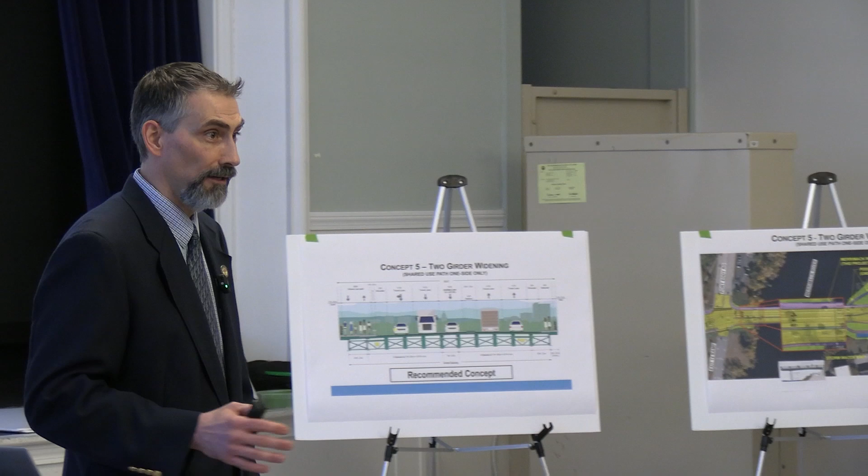Welcome, Loudon Road Bridge. You're all here because you saw the advertisement, so you know what we're talking about: Loudon Road Bridge over the Merrimack River. Let's run through our agenda really quickly.

After the welcome and introductions, we'll situate you with the location of the project we're talking about. We'll go into some history, go over where we are to date, talk a little bit about the purpose and need of the project, the concepts we've looked at, get into the budget and schedule at the end, and talk about next steps.

So let's start with introductions. I am Mike Bezanson, city engineer for the city of Concord. Our transportation engineer in the city is Karen Hill. She's not with us tonight, but she's certainly had a key role over the last few years in the development of getting the project to where it is today.

We also have Tony Punton here tonight. He's with DOT, our project manager, keeping us on track because this is a state and federally funded project, following all the procedures for that.

And then we have our engineering consultant group, and they're with us tonight. We have a full team. Rock Larichelle is here, and he'll be doing the bulk of the presentation tonight. We also have Keith Cota, technical advisor. We have Nick Karen, our design lead on the structural side, Debbie Finnegan, design lead on the traffic side, and Kevin Slattery, who's not here tonight but is our environmental lead. So that is the team.

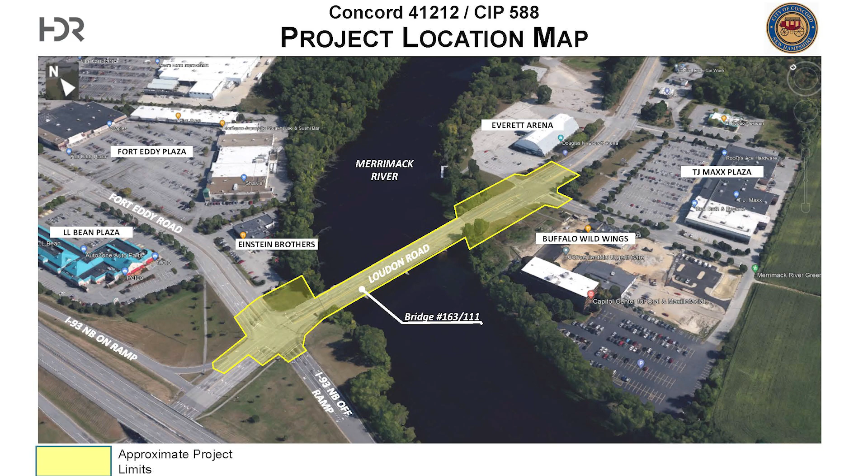So let's zoom in a little bit closer. This is really the project area. If you can see it highlighted in yellow here, this is what we're talking about, from either signalized intersection on either side of the bridge. That's really the project area, from Fort Eddy over to that first intersection with the Kiwanis Riverfront Park and the Everett Arena.

So all of the things that we'll be talking about are things that we're working on within this project area, and within this project area only, really.

So going over the project, basically it is a project that's in the city's CIP. We've already had funds appropriated in years past to begin the design, which is why we're here today, because we've had that funding.

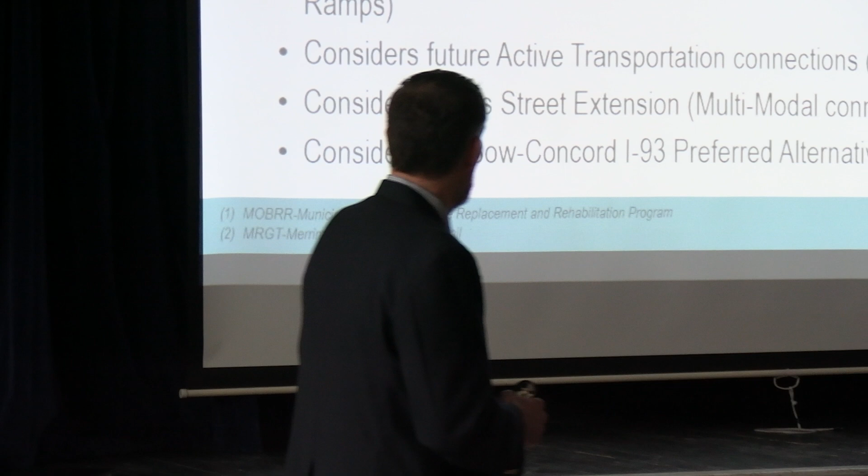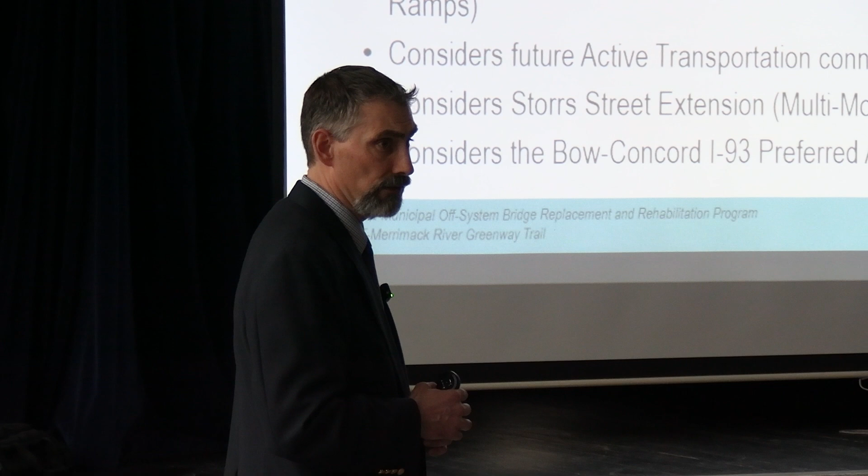This project also has a DOT project number because it's a funded project, state and federally funded. It's in the 10-year plan. We'll get into the funding a little bit later in the presentation, but you can see that there's a significant amount of construction funding already in the 10-year plan for the state.

Study limits, we went over that: Fort Eddy to Everett Arena. The project design is compatible with the multimodal plan.

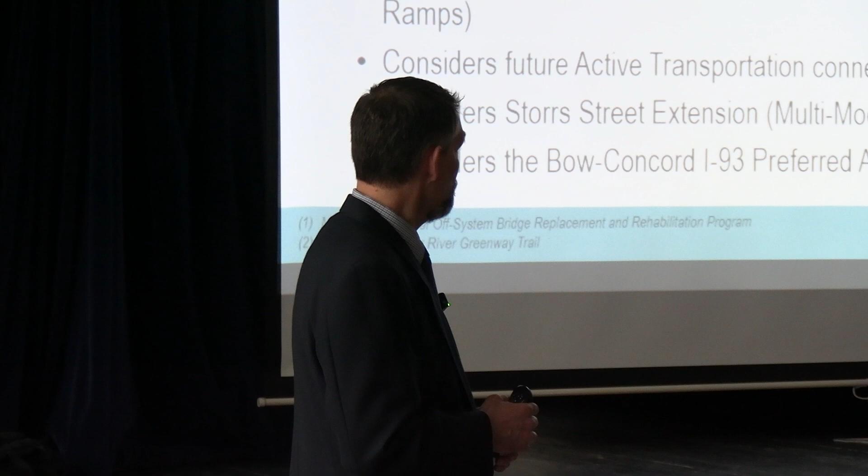So we have a multimodal plan that involves the Merrimack River Greenway Trail, and the Merrimack River Greenway Trail is being built out. Phase 2 just completed last year through the Gully Hill Fields area. And this project, we're looking to connect over the river on the bridge. We'll get into that a little bit more, some of the specifics, you'll see that in some of the slides.

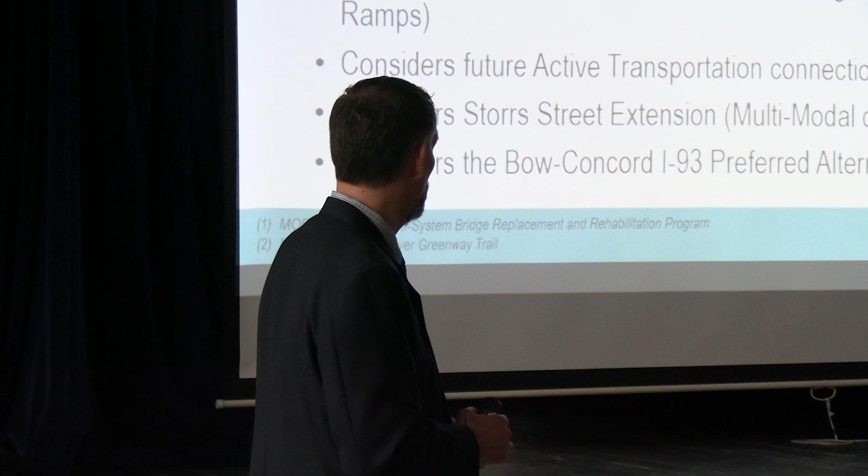But overall, the project is looking to address operational and safety concerns from a vehicular standpoint, as well as safety concerns from a pedestrian and bicycle standpoint. So we'll look at all of that. As I mentioned, connecting the Merrimack River Greenway Trail, and obviously we will be coordinating with the I-93 Bow Concord project, since it's right adjacent to our project area. So we'll be coordinating with what's going on there.

But this meeting tonight, as we get into questions at the end, we'll be focusing just on the Loudon Road Bridge project. So although there may be folks here in the room who are familiar with and part of the team for the I-93 Bow Concord project, we're going to focus tonight on the Loudon Road Bridge.

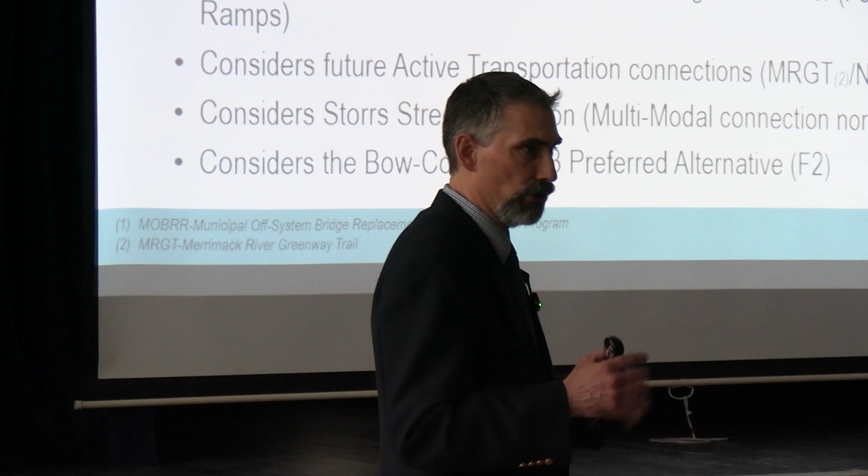Thanks, Mike. First, thank you for being here tonight. I'm grateful that you're taking time out of your day to come listen to this presentation, and obviously you're interested and involved in your community. We're going to throw a lot of information at you tonight, and hopefully we'll get some input back from you as we continue through the design process.

It's a great project that we've been involved with for quite some time now. I know the project's been around for a while, so we're going to walk you through some of the details and hopefully answer your questions.

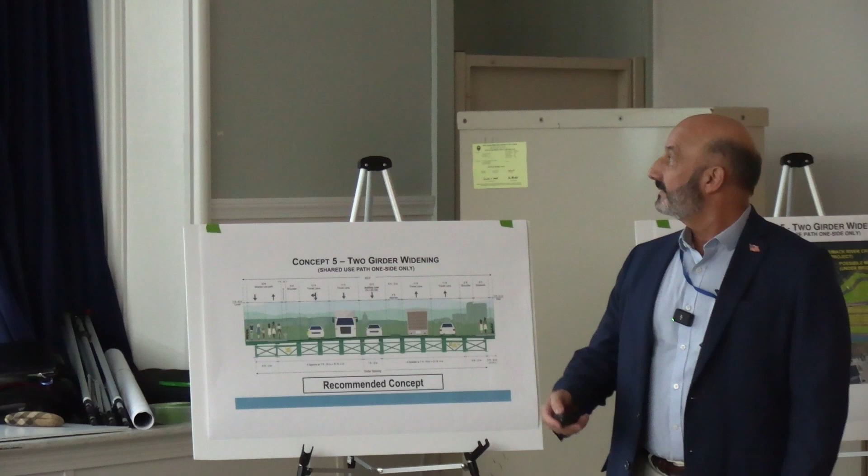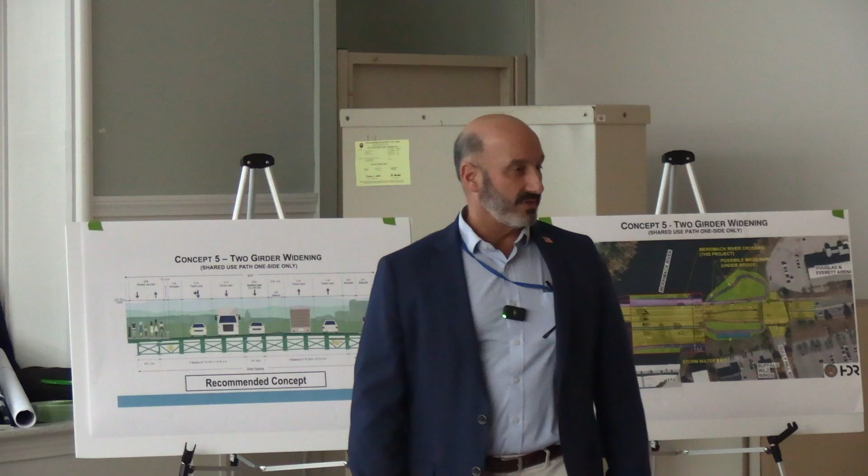First, through the project development process that we have to follow. This is a pretty laid out process associated with the state and federal funding we're working through. When you look at all these bullets, what I just highlighted in red is kind of where we're at now. We've already been through some of the data collection process and analyzed some existing conditions.

I'll show you where and when we did that earlier on. Tonight we're going to show you what the purpose and need statement is that's been developed for the project, and what it really means to moving forward with the development of the project. We've also looked at a conceptual range of alternatives.

We have some more work to do there after we get some input from folks tonight and as we continue on with the design process. And we're looking to seek input from the public, from you folks all here tonight.

Following this meeting tonight, we'll be continuing to look at some of the environmental impacts of the alternatives, how it's going to fit in with the community, how it's going to fit in with the physical properties of the area. And then we're going to move towards a recommended preferred alternative that meets that purpose and need statement that I'll show you in a bit.

And ultimately develop a proposed action plan that we can build. This is just kind of a snapshot of the typical development process that we're following. It's called the LPA process, Local Public Agency process that we have to go through.

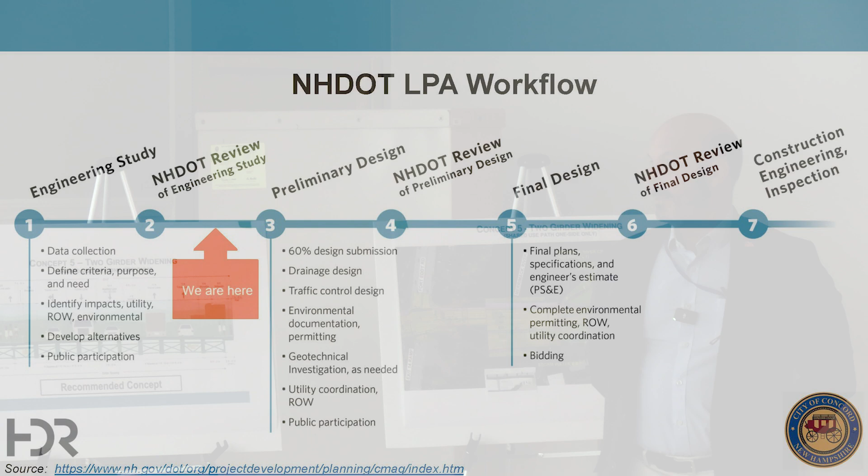And where are we at in this process right now? We're about right here. There was an engineering study completed back in 2020, I'll show you the timeline for that. So there's been a little bit of work done back then to get to where we're at right now. Now we're partway through that preliminary engineering phase, and we're going to be getting further into that, moving along through final design and construction. That just gives you a snapshot of where we're at.

So what have we done to date? I said we've been working on the project since about 2020, and I'll give you a snapshot of this. I'm not going to expect you to read all of this, there's a lot of information here. But just as a snapshot, since 2020 we started an engineering study in that time frame.

We made a number of presentations to TPAC and City Council. A few of you here tonight attended those meetings, so hopefully you remember that. The whole purpose of going through that engineering study was to identify some of the constraints and possible alternatives to solve some of the problems in that area dealing with the bridge condition, access for pedestrians and cyclists as well as vehicles, and how we could improve some of the safety and mobility issues within the corridor along the bridge.

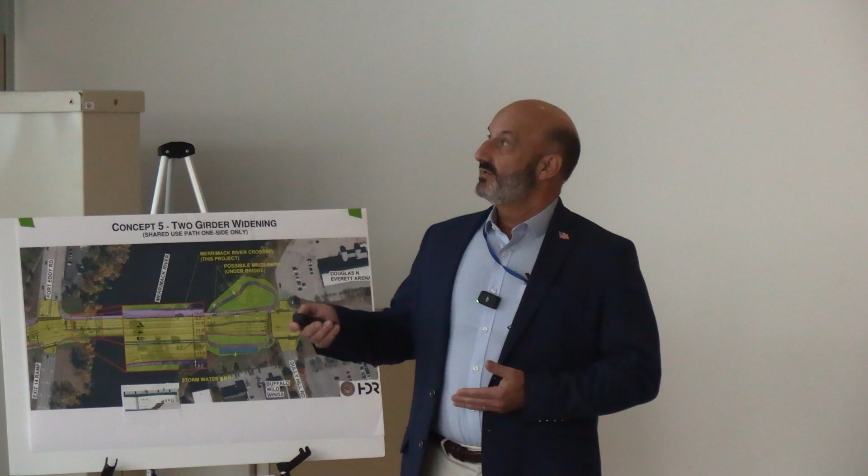So we made a number of presentations to TPAC through 2020. We had a draft engineering study submitted in early 2021. Then at the end of 2021, that all culminated in making a presentation to the GACIT Committee, the Governor's Advisory Council on Intermodal Transportation. Ultimately, what we sought out of all that was to get additional funding for the project. Originally, the project was funded at the federal level at $9 million, which only accommodated for a small deck rehabilitation type project.

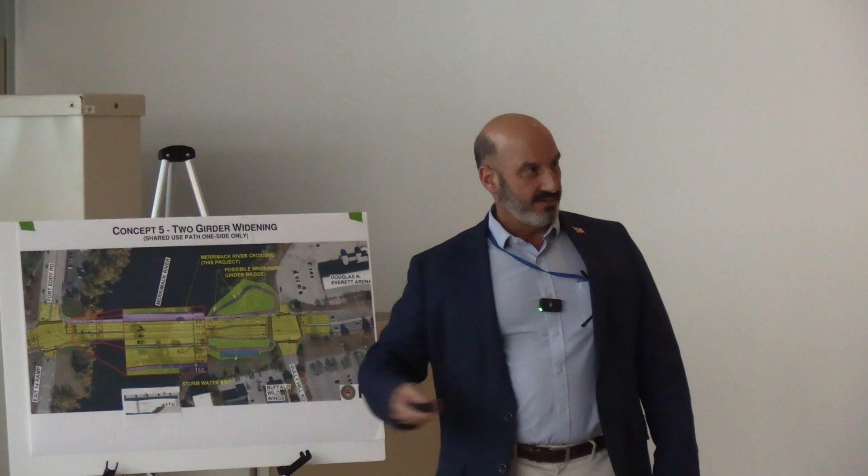Ultimately, with some of the goals brought forward by the city for what the project wanted to be, to accommodate more multimodal needs and safety improvements, we were successful in getting additional funding through the state's 10-year plan to the sum of about $25 million, which is what Mike presented earlier. After that, at the end of 2022, there was a little bit of a lag because the 10-year plan was getting authorized, and Mike was just coming on at that time, so there was work he had to do to get the project into the program at the city level.

We were authorized to start our data collection phase in early 2024. There's a little lag as things got into play, the money got into play, contracts got underway, and we started what we called phase one. We've already been out there collecting a lot of traffic and environmental data. You might have seen people counting cars and collecting information. All of that goes into the decisions on how we move forward with the design and finding a project that fits within this community. In January 2025, not so long ago, we were finally authorized to move forward with the design phase. We collected data, and now we're moving forward with the design phase. That takes us to tonight, March 20, 2025, and from there we'll continue to move. I'll look at a schedule a little later and show you where we're going to end up.

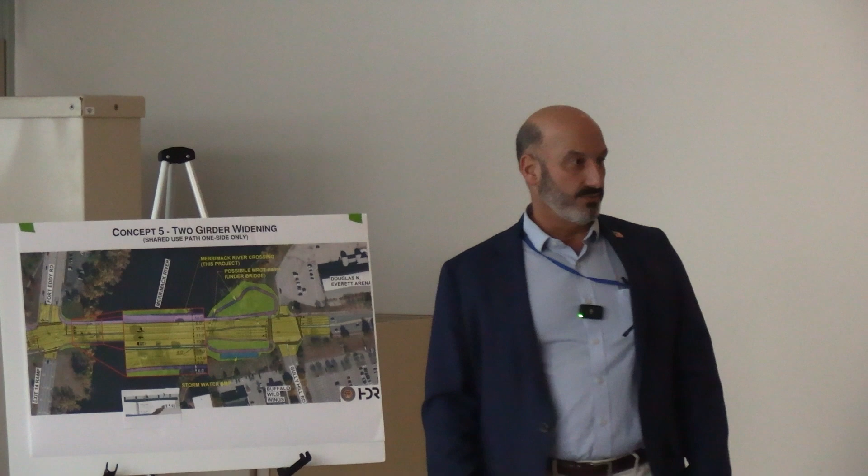So the study area for the project is defined here, what's highlighted. We've collected traffic information all through this project area in this corridor, all the way up Fort Eddy Road and Loudon Road, updated traffic information from what was originally studied in 2020, because some of that information was dated. The whole point of getting updated information in 2024 was to look at how the corridor is operating now post-COVID, and refine the design to make sure it worked with what we're trying to do now with safety improvements and modifications.

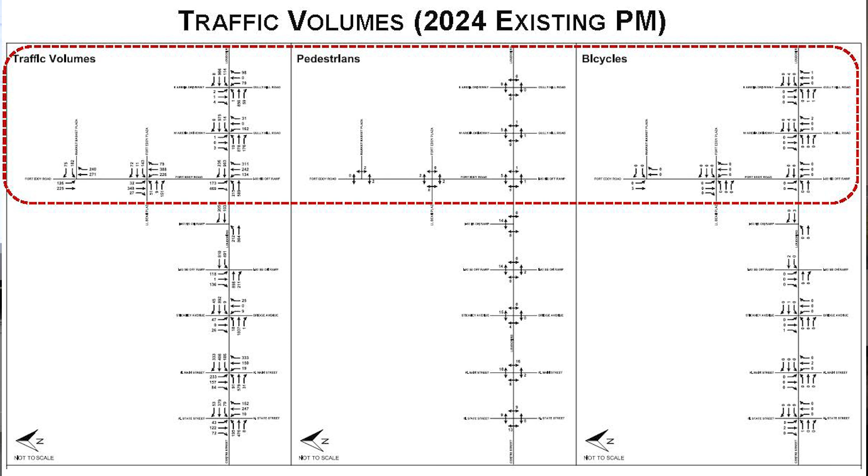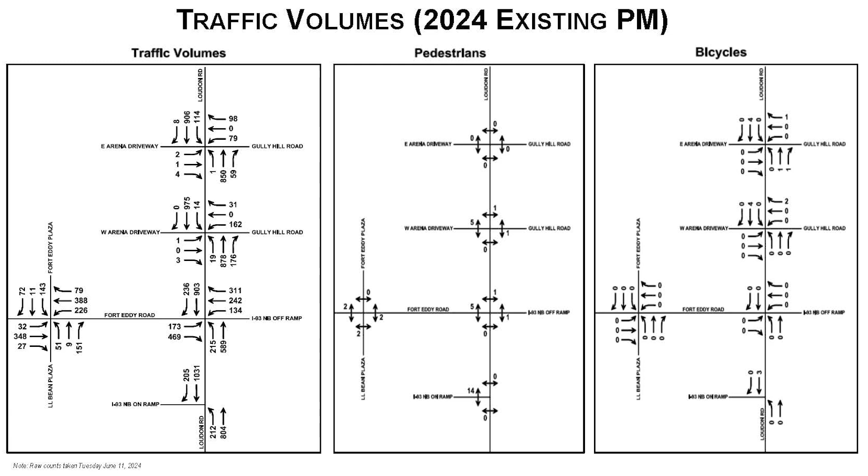You're not going to be able to read this, but this shows the traffic volumes collected in 2024 and what the network looks like after all that data collection is put on a plan. This area here is really the project area we're concerned about — the ramps and Fort Eddy Road, and this is Gully Hill Road here. We also collected traffic information as well as pedestrian and bicycle information, and that all goes into the study we're evaluating moving forward.

Interestingly, back when we did the original study in 2020, there was traffic collision data collected from 2015 to 2020. One thing I want to point out is this intersection at Fort Eddy Road had a total of 77 crashes over that period, which is very high, resulting in a very high crash rate of 1.26. As you approach 1 and go over 1, that's one of the things we look for as an identification that there are needs there.

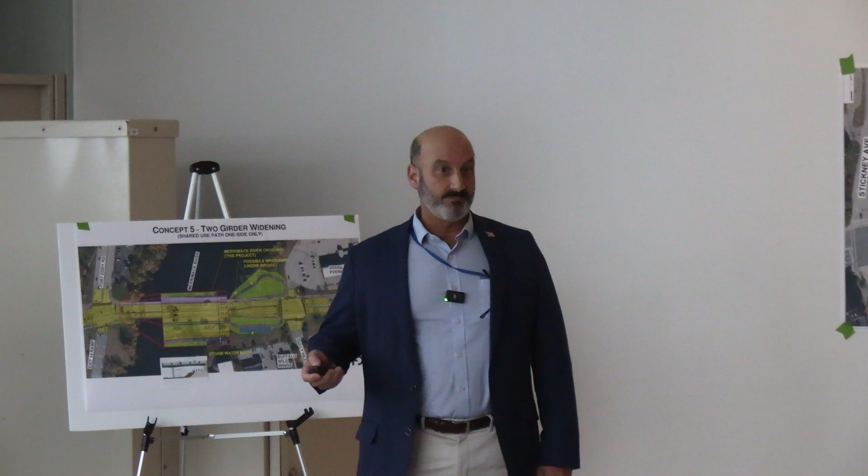As far as data collection, one of the things we also have to do is go through the environmental process — identify resources, figure out how they'll be impacted by the project, document that, and that becomes part of the permits and approvals we're ultimately going to have to seek. The environmental process involved early constraints identification, so we've collected information from wetlands to invasive species, wildlife and fish habitat. Some of this is still going on now as I'm talking. Ultimately it's going to support the NEPA document and permitting — the National Environmental Policy Act. It's a whole permitting process we have to go through to satisfy certain needs in association with the funding we have for the project.

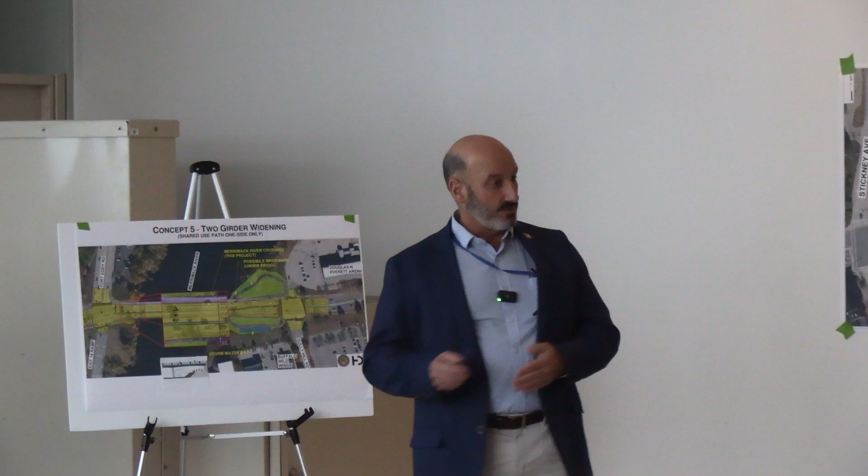One of those needs is the development of a purpose and need statement. The purpose and need statement is developed by the project team with input from various constituents to look at and judge the project. The future project has to be judged against the purpose and need statement — are the alternatives we're developing supporting the purpose and need statement that's been developed? We have to look at the alternatives against the purpose and need statement, and if the alternatives don't satisfy it, they probably shouldn't be applied.

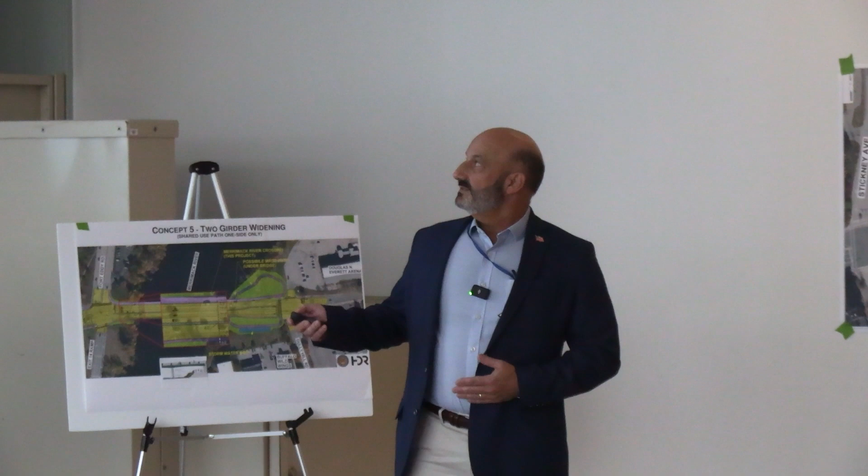The purpose and need statement is required for NEPA clearance, the National Environmental Policy Act. It defines transportation issues and needs, states the reason for the undertaking and the intended outcomes, and is used to compare the effectiveness of build alternatives against the no-build alternative.

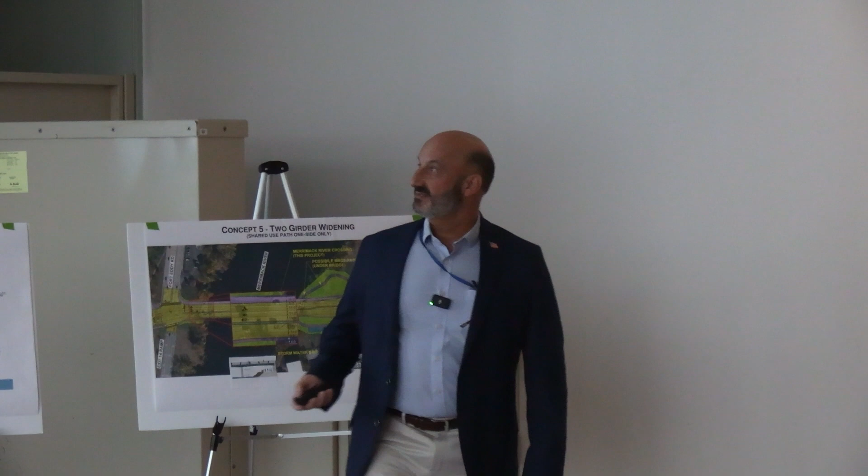For this project, the purpose—and I want to read this because it's important—is to address structural deficiencies, safety concerns, and conflicts between vehicles, bicycles, and pedestrians on Loudon Road and the municipal red-listed bridge over the Merrimack River.

That's the overall purpose of the project. The need is defined to address the following: structural deficiency of the deck—it's a bridge project first and foremost, it needs a lot of work—and superstructure and abutment back wall deterioration.

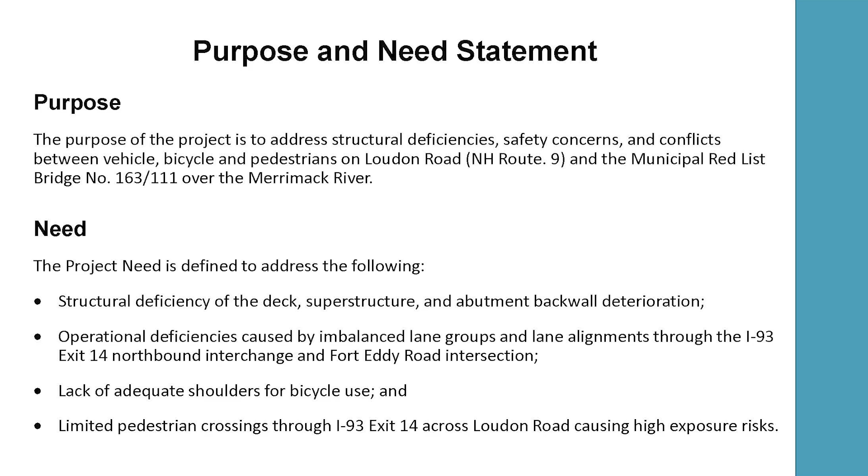Second, operational deficiencies caused by imbalanced lane groups and lane alignments through the I-93 exit 14 northbound interchange and Fort Eddy Road. You all know there are issues at those intersections. The project extends from Gully Hill Road, including Fort Eddy Road, so our job is to look at how those intersections operate and find improvements that won't worsen conditions and might make things a little better.

Lack of adequate shoulders for bicycle use—if you've been out there, it's pretty awful, the things I've seen on that road are pretty scary. So you'll see with the options that have been put together, there are better accommodations for bicycles and pedestrians: sidewalks, shared use paths, shoulders, to allow for improved safety, buffers to vehicles, and better organization for the traveling public. There are also limited pedestrian crossings through the I-93 exit 14 across Loudon Road, which is something we're taking a look at as well.

In association with that, we defined a series of goals and objectives, and all of these go into evaluating each of the alternatives we're studying as part of the project: provide improved service life for the Loudon Road Bridge over the Merrimack River, and address structural deterioration and removal from the municipal bridge red listing.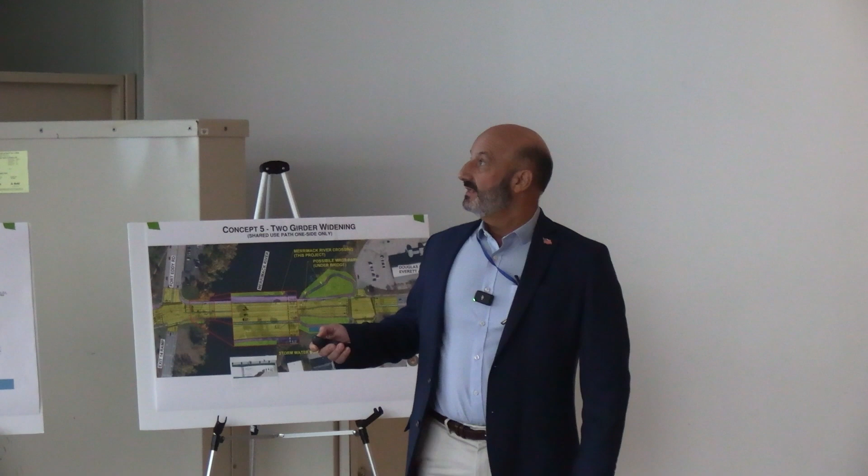Implement infrastructure improvements that will accommodate the city's long-term objectives for multimodal and recreational connections between Kiwanis Waterfront Park, the Merrimack River Greenway Trail, and the Northern Rail Trail. These are all things we heard during the engineering study that were vitally important to the community, so they really had to be incorporated into the project.

That was one of the goals we had as part of the project—how can we accommodate these needs and make accessibility improvements as we move forward. That was a big consideration, and you'll see that as we get into some of the alternatives that were reviewed in the engineering study back in 2022.

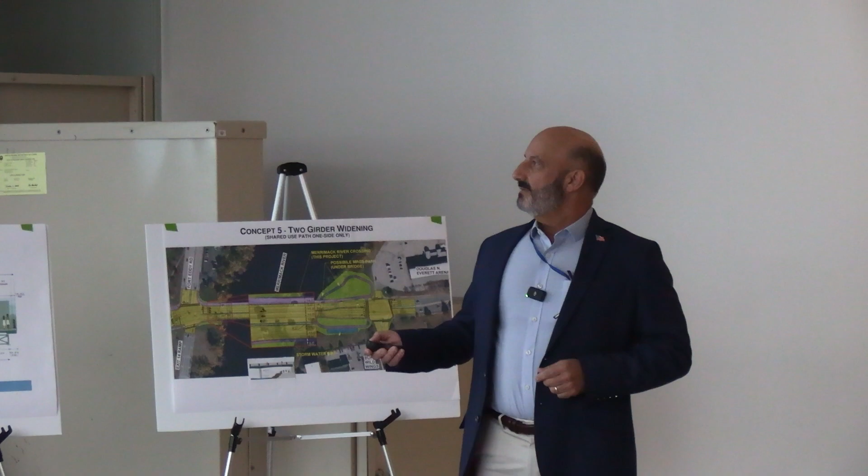Complement and accommodate improved operational flow and traffic safety. We're looking at operations at Fort Eddy Road, and some of that includes operations at exit 14. This is not the interchange project—we're really focused on abutment to abutment and those two intersections, and how we can make safety improvements there.

Implement needed utility infrastructure improvements. One of the things we've been working with Mike on is coordinating the need for water line improvements, and there's another consultant working on that as well, which will get integrated into this project as that design moves along. So that's all part of what goes into the bridge. There are utilities hung under the bridge, including the water main, and any utility that's impacted has to be properly supported during construction, maintained, and or replaced as improvements are needed.

Last, minimize project impacts to local businesses as well as natural, cultural, and environmental resources. What we're really trying to do is keep a very tight footprint, even though we're looking at wider accommodations mainly for pedestrians and bicycles, and safer accommodations for vehicles, so we're not having significant impacts to the right-of-way or the natural and cultural resources out there.

Now I'm going to step you through the concepts we've looked at. Some of this stems back to the study done early in 2020, so you're going to see some early concepts. I'll step you through a series of 5 concepts that were evaluated for the bridge, and tell you why.

One of them just included a deck replacement, with 5-foot sidewalks on either side. This was basically putting back what's there today. If you look at what's there today, we'd put it back and make some minor modifications, but it really wouldn't change what's there today.

The second alternative again looked at deck replacement, but looked at widening the sidewalks and shoulders—adding a shoulder width instead of the 2-foot, where there's virtually no shoulder width out there today—adding wider shoulders and wider sidewalks, going a little bit wider.

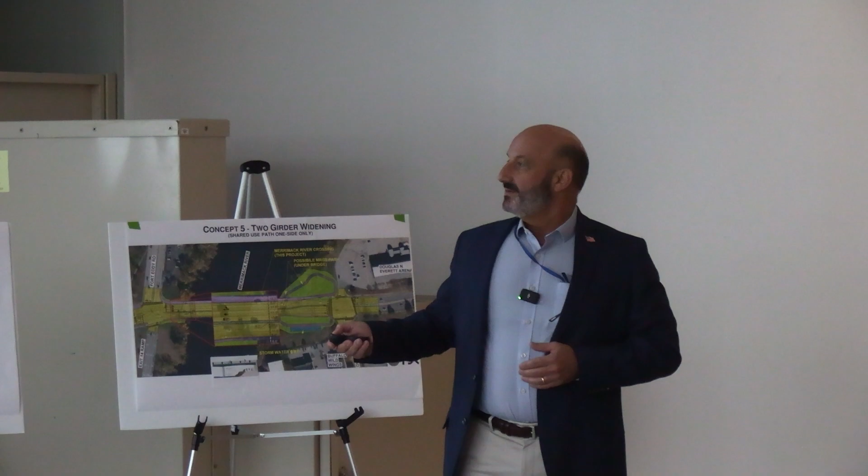Alternative number 3 looked at one-girder widening, so incremental modifications to the bridge to make it a little wider for better accommodations, including a raised island in the middle. It went to 5 travel lanes, 6-foot sidewalks, and 5-foot shoulders. Alternative number 4 included 2 girders, so you get the sense of what's happening here.

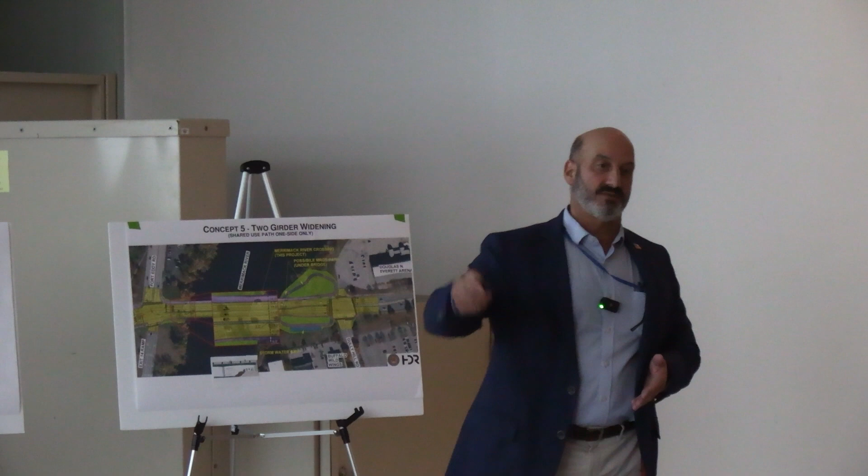The last 2 alternatives included shared use paths, and this is when we started looking at accommodations for the Northern Rail Trail and the Greenway Trail, and how we could accommodate those connections for improved multimodal uses. So those are the last 2 alternatives.

Concept 1: no bridge widening. This is a nice cartoon figure showing what it looks like out there today. You have 2 lanes heading up to the Heights, 2 lanes heading into downtown, and a right turn lane that goes into Fort Eddy Road. In the middle is kind of like no man's land, where there's a gutter that's painted, and that's where the drainage goes when it rains.

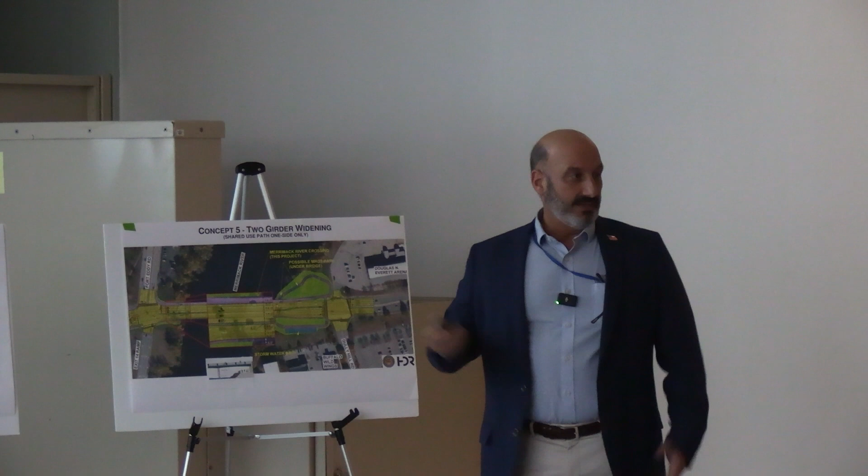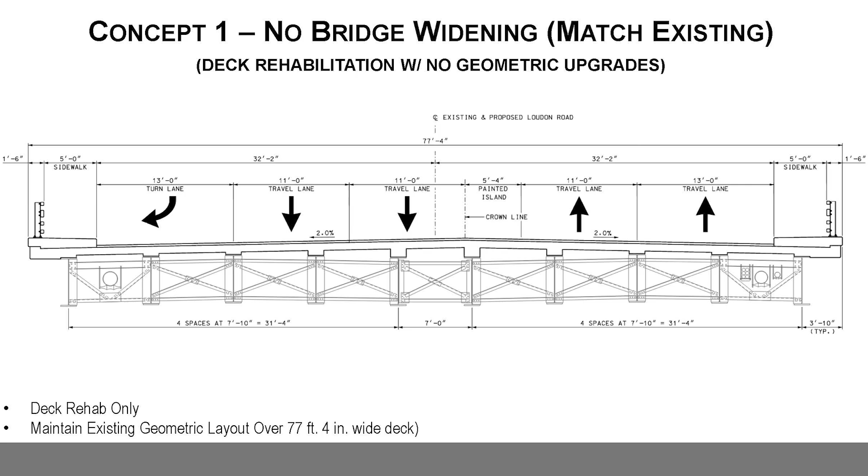So concept 1 would basically put that back, no bridge widening—this is the engineering version of that concept. No bridge widening, match existing, but we'd make some improvements to the overall bridge typical section and eliminate the gutter in the middle. Put back the 5-foot sidewalks, maintain the lanes out there: a turn lane, and 2 through lanes each way.

That's concept 1—no accommodations for connections to the Greenway Trail or any path connections, or wider shoulders. Concept 2 shows lane reassignment only. What that did is take the right turn lane into Fort Eddy Road and combine it with the through lane, because the demand wasn't shown to be there from the traffic volumes we were looking at.

So combining that took the width from that right turn lane and redistributed it into 5-foot shoulders on either side and a 6-foot median in the middle, with 6-foot sidewalks on either side. That's concept 2—no significant widening, no additional girders. It basically takes the existing structure and builds on top of that.

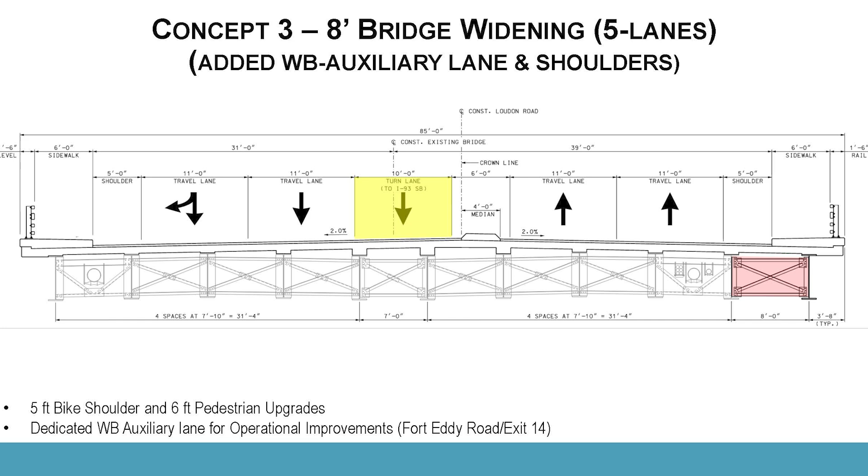Concept 3 added a westbound auxiliary lane. What does that mean? This lane would become a dedicated turn lane that would ultimately go to the southbound on-ramp for I-93. As you know from sitting in traffic out there, a lot of that traffic queues up back past Gully Hill Road and causes significant congestion issues, especially in the PM condition.

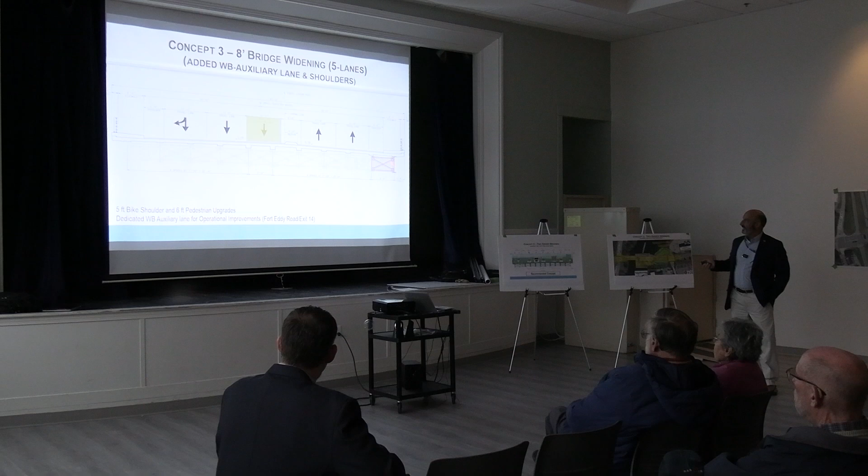So this also combines the right turn lane to Fort Eddy Road, maintains these 2 through lanes which go into downtown, and 2 lanes which go up to the Heights, 5-foot shoulders, 6-foot sidewalks, and one new girder on the outside, on the downstream side.

Concept 4, similarly, introduced a 12-foot shared use path on both sides. So we asked, what would it look like if we put shared use paths on both sides of the road and widened to accommodate that, plus a new left turn lane and a dedicated westbound auxiliary lane to the interstate. That resulted in a significant widening, 97 feet overall, with a 20-foot widening on the bridge. That was concept 4.

We'll look at the costs associated with that in a minute. That's the last thing we looked at - how does that reflect in the cost estimates?

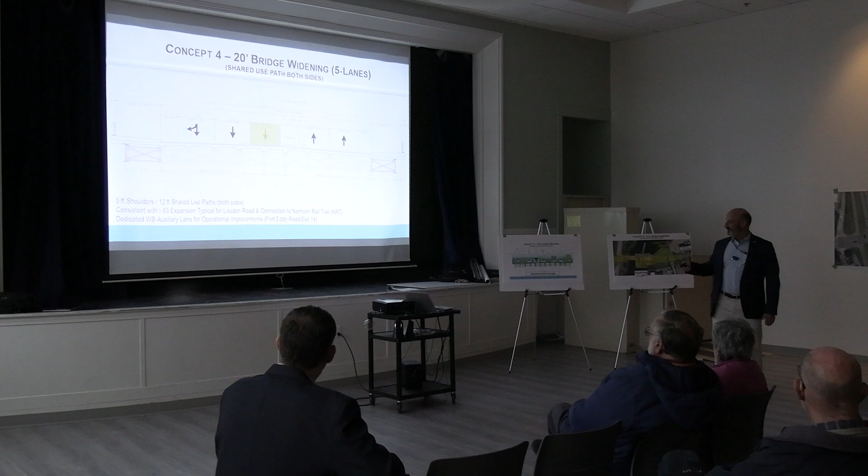Concept 5 was the last one we looked at: a 16-foot bridge widening, still 2 girders, but it took a balanced approach to the shared use path concept, putting a shared use path on the upstream side, maintaining a 6-foot sidewalk on the downstream side, 5-foot shoulders on both sides, and adding an auxiliary lane to I-93 southbound. This was seen as a balanced alternative that would provide a bidirectional shared use path here while still providing good mobility on the downstream side, and seeking to improve some of the operational issues at the interchange.

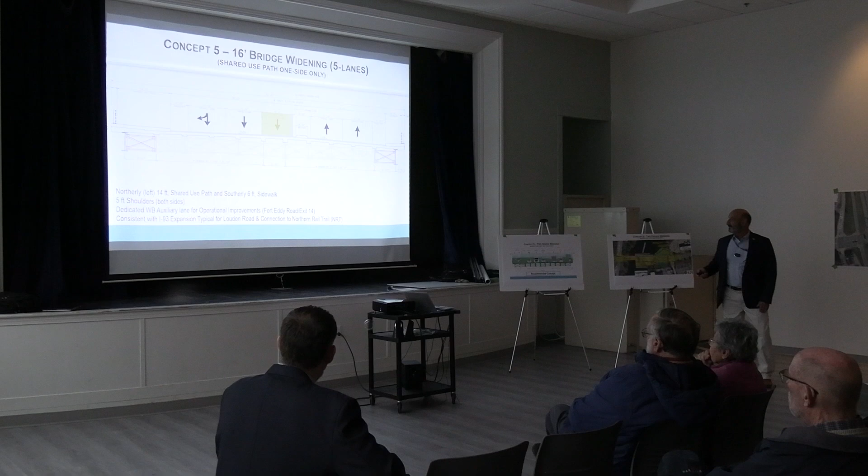So the recommended concept that came out of all of that, after we were done with the study in 2020, looks something like this.

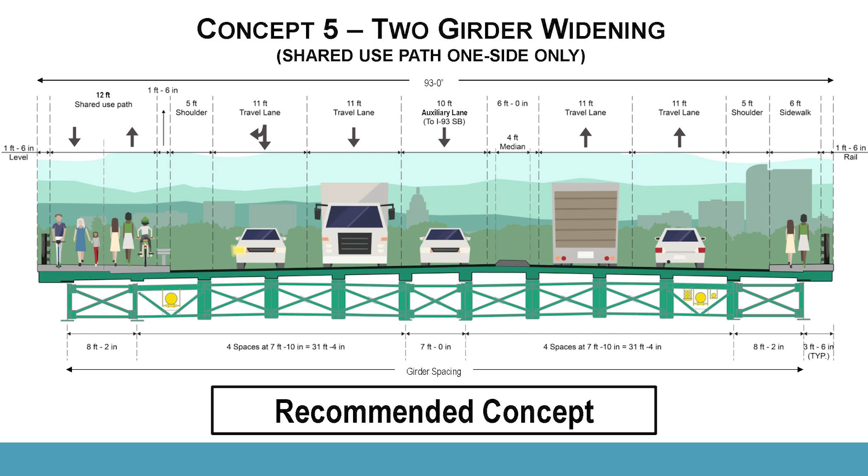The recommendation made to TPAC and City Council, and what we brought to GACIT to support the additional funding ultimately provided for the project by DOT and programmed by the city, resulted in this shared use path on the upstream side, sidewalk on the downstream side, 5-foot shoulders, and an auxiliary lane to I-93, with 2 lanes into the city and 2 lanes to the Heights. This is what was being moved forward as the preferred alternative, or the recommended concept.

In plan view, that's what you see up here and here. This is what it looks like in plan view, showing all of the lane widths and what the geometry looks like, including improvements to Fort Eddy Road.

Just to explain the colors a little bit - yellow is new pavement, that would be new roadway pavement. This purple up here would be new sidewalks and walkways. Crosswalks you can see here, 2 signalized intersections as they are today. And one of the things we were also looking at was this path connection to the Merrimack River Greenway Trail.

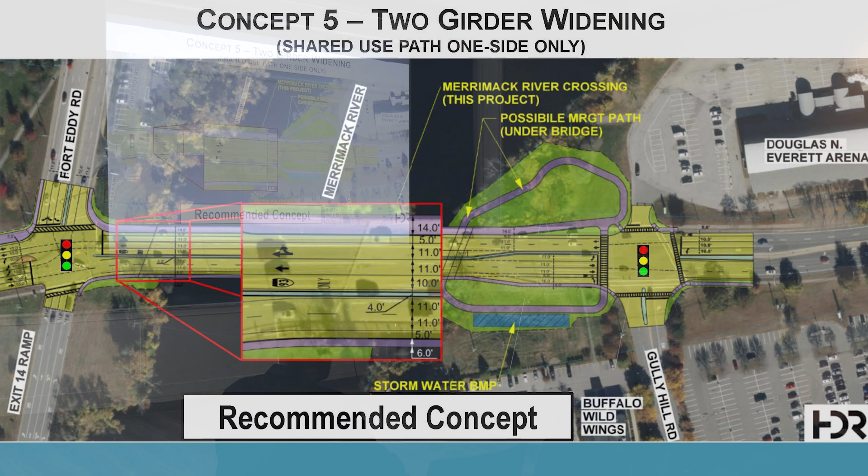I'm going to talk about this crossing right here. This bulb out here is a concept put together for the possible connection to the MRGT. These are things we're still working through in the final design - it's not solid yet, so we still need to work through the concept, the environmental considerations, and the permitting considerations. This is something we'd like to have in the project, but from a cost and permitting perspective, we're not quite sure yet. Hopefully when we come back and present the plan again, we'll have a better idea of what we can do and how much it's all going to cost.

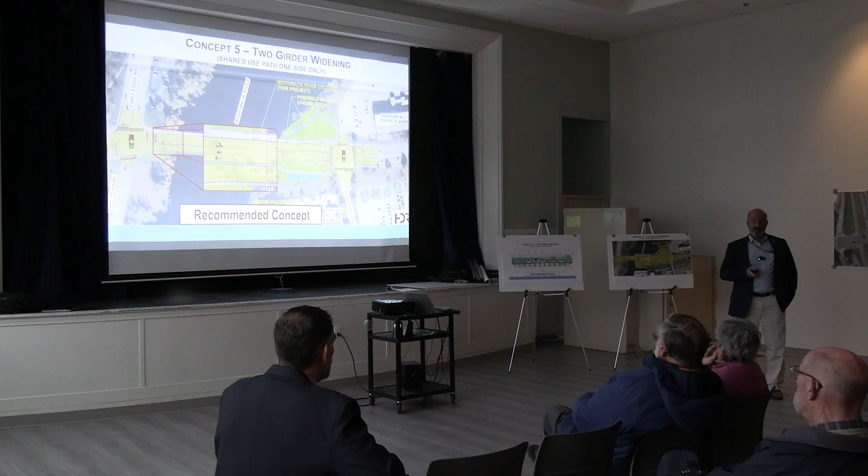We understand there's a plan in front of the city right now for the redevelopment of the Everett Arena. It would actually work kind of nice with that, because when you look at that plan, it shows a path connection which connects up to this, which works well with the plan we have here.

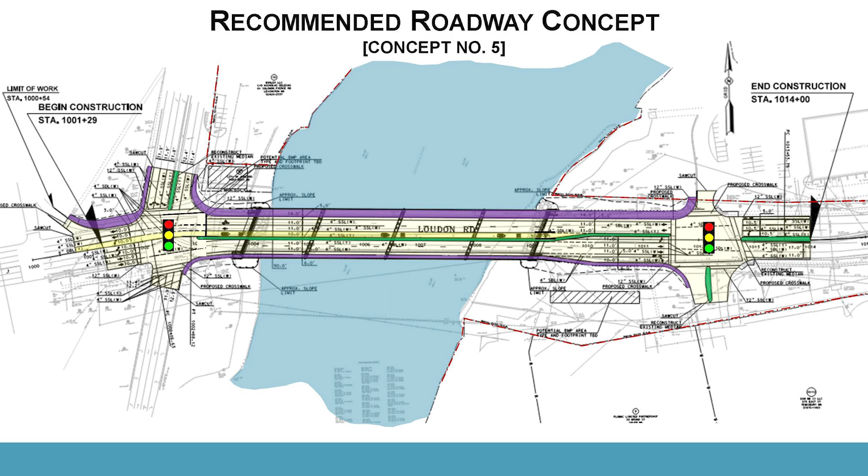This is just another engineering view of this, showing the overall length of the project. Purple is the shared use path on the upstream side, and purple on this side is just the walkway, the sidewalk on that side. Green is the raised median - today you have no raised median. Under this condition, you would have a raised median in the middle, providing for some better safety conditions out there.

Signalized intersections. This yellow lane reflects the auxiliary lane that would be the dedicated left, picking up here and storing all the vehicles queuing up to go to the southbound on-ramp in the interchange.

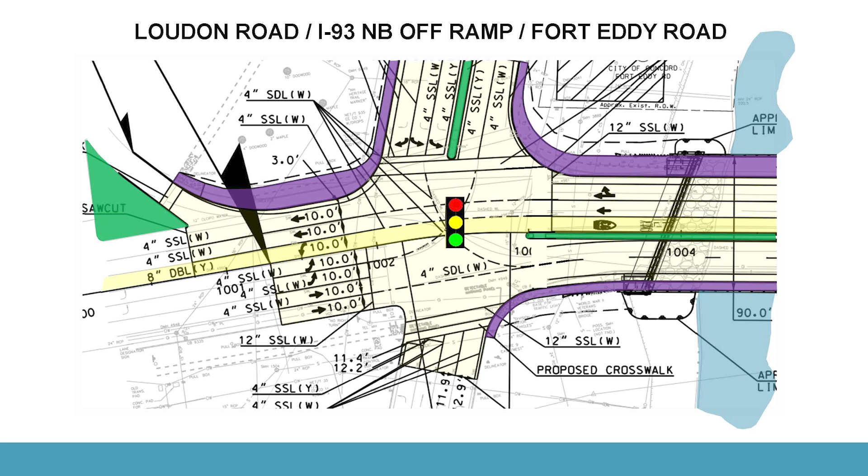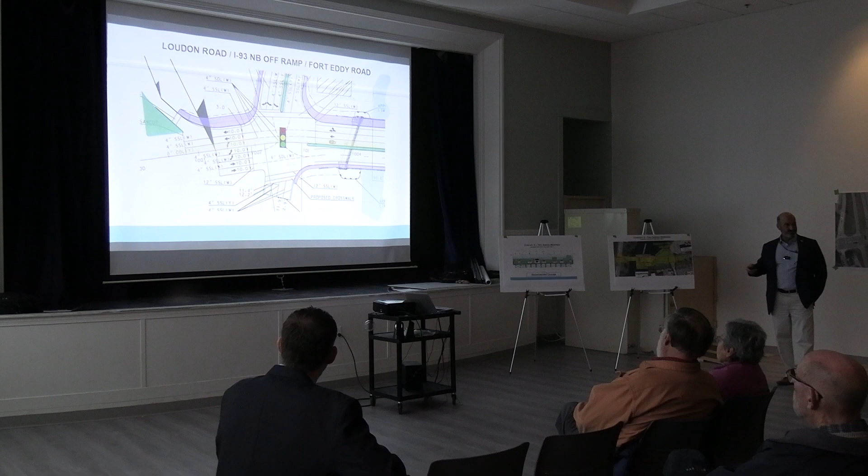This is just a blown-up view of that same intersection. You can see that lane coming through here, maintaining two lefts out of Fort Eddy Road to clear that traffic, the right out of Fort Eddy Road, two rights coming off of the turnpike or off of the ramp, and two lefts into Fort Eddy Road. We sought to improve the geometry here coming through the intersection, because it's kind of a hook as you're going through it today. With the bridge widening on either side, it allowed us to soften that up and make it a better condition as you're driving through there.

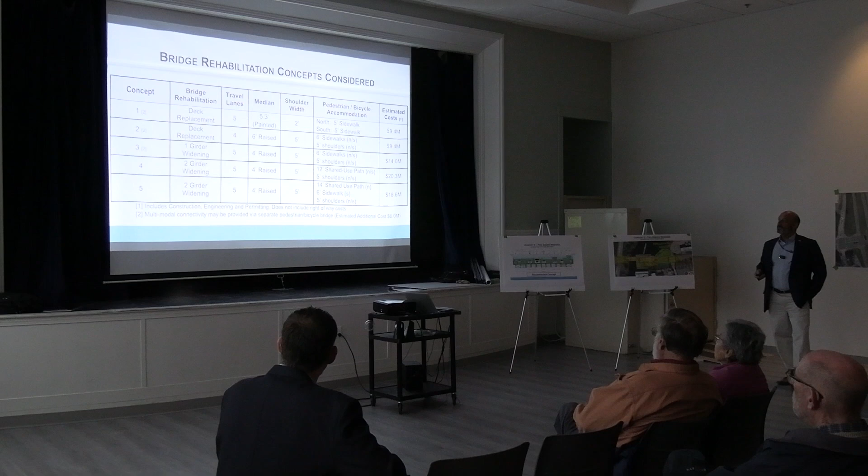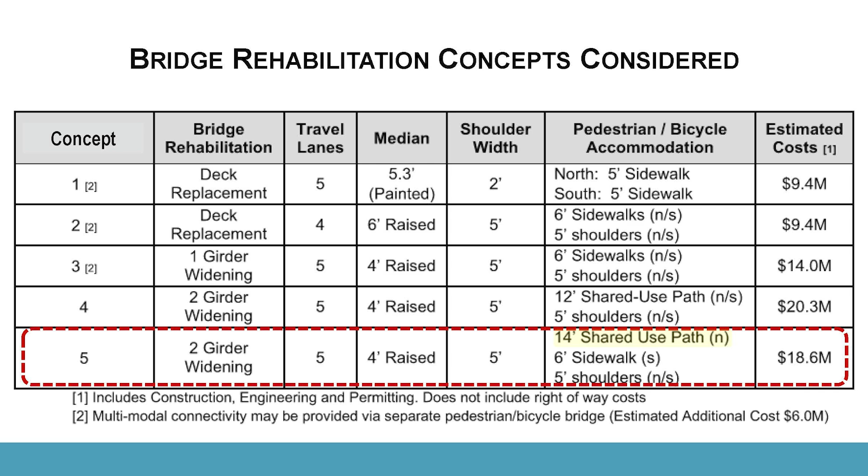When we looked at costs for each of these alternatives, that was one of the big things we had to do as part of the study completed in 2020, and how we got to GACIT for ultimate funding. The original funding programmed at the DOT level for just a pure deck replacement, putting back what was there, was $9.4 million. Going through all the different alternatives we studied, you see the range, including alternative 4, which had the shared use path on both sides at $20 million. Then concept number 5 came down a bit at $18.6 million, reflecting the shared use path on the upstream side.

This was the preferred concept that was put in front of TPAC, City Council, and GACIT.

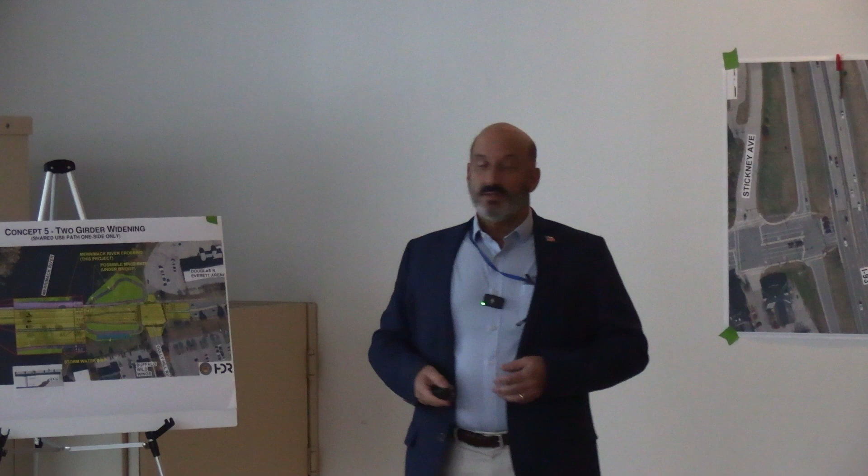So as we go through all of this, there are still some things we haven't worked out. We're not done with the design, the project's not complete yet. We still have a lot of work to do over the next couple of years to get to a point where it's going to go to construction. There are some other design considerations we have to get through, and I'm going to show you some of those.

One, obviously, is the I-93 project, Bow to Concord. I know Jason's here tonight representing the department for that. What you can be assured of is that we're coordinating the design of this project to make sure it will ultimately fit with what the department is going to do with the Exit 14 interchange. Construction of that will come later, so this project will be built first. What we're building is matching the existing condition out there today, so we see it as an interim condition, but we're going to match what's out there today.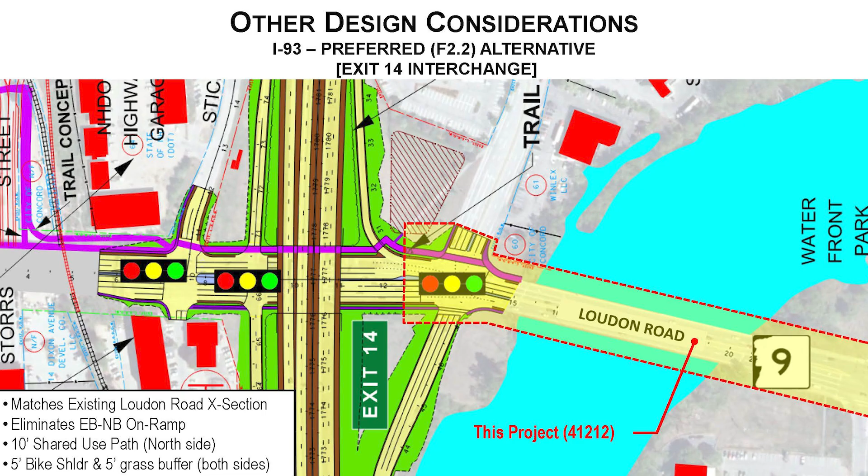In the Bow to Concord project, we've coordinated this connection for the ultimate MRGT connection coming across the bridge here, across here, across here. This design accommodates a 10-foot shared use path, 10-foot shared use path under the interstate, ultimately heading up to form a connection with the Northern Rail Trail up off of Storrs Street.

This is one of the things we're still working through, and it's kind of an exciting part of this project. When you look at this trail connection we've been talking about, the idea was to actually go underneath the bridge in this area so that folks coming up through this connection here, which is not built yet (shown in red), the planned MRGT connection from the parking lot that's been constructed, up Gully Hill Road — this seeks to provide an opportunity for people to get onto the path and head up into downtown and into the trail connection without necessarily crossing over Loudon Road. So you could come this way, hit the path, go underneath the bridge, make that trail connection, and then head off this way into downtown.

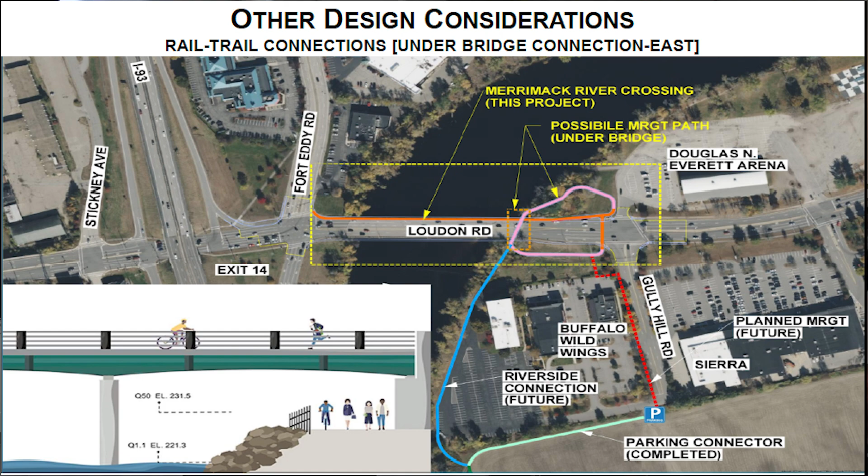What does that look like? It looks like this. So this is a rendering that we put together which kind of shows what that would look like with people. I think it's a 10-foot clearance from here to here, which allows for people on bikes and pedestrians to get under there.

It would be protected here. One of the things we have to consider, though, is what happens during flooding events. You know what happens when the river comes up. So when we look at flood elevations, this might be the normal Q1.1, a flooding event that occurs every year, down here, and then a Q50, traditionally something that occurs every 50 years, although now more frequently, would be up in this area. In the higher storm events, this would be inundated, and that's something that has to be planned for if it's going to move forward.

Not unlike what happens today in the fields in this area, at the sunflower connection. That would be under the same conditions. So if this floods, this would be flooded as well, and this would actually be flooded first. Right, Greg? Yep. Okay, so it should be nothing new. There's no new condition here, but just full disclosure, that's something that may have to be closed periodically depending on what happens with flooding events.

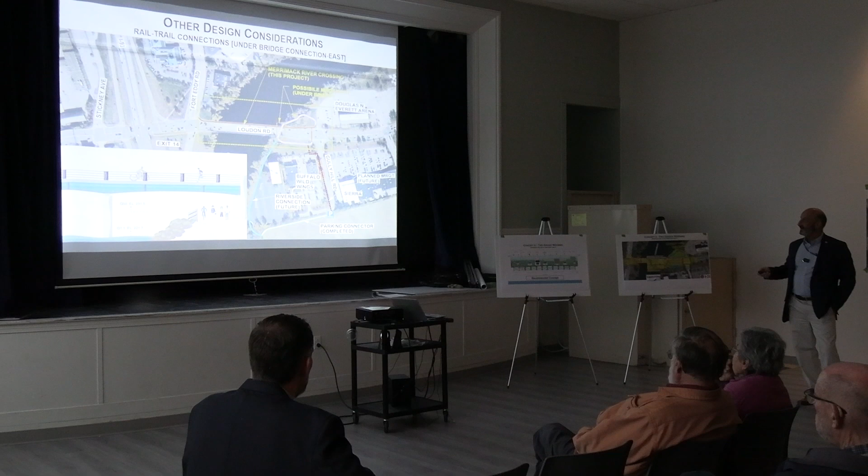And then you still have this connection on the street side to be able to make this crossing, so there would still be a crosswalk here to make that connection, but people on bikes would have to dismount and walk across.

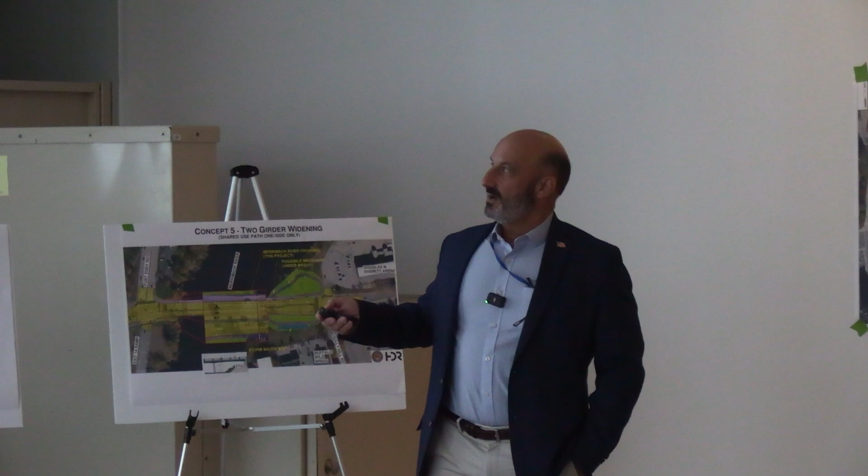So we're looking at a positive concrete barrier, something that looks like this with a railing on top, and then a pedestrian railing on the back. This one's in Dover, the Scammell Bridge. I'm sure some of you recognize that. So this is a similar application that we're looking to put onto this bridge here on that upstream side.

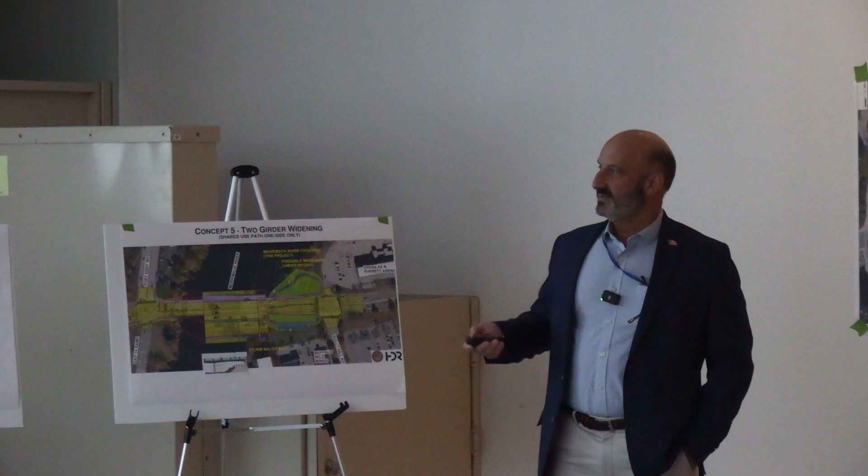Similarly, this is the Connecticut River Crossing in Hanover. This is something we could do here as well. This is different because it has a steel rail here and then a pedestrian rail on the back side. This one here is in Plymouth, again a concrete rail with a pedestrian rail on the back side.

And then this is a slightly different application where you have a bar rail on the front side and then another different type of pedestrian rail on the back side. The requirements are it needs to be crash worthy on the inside, so if it gets hit, it needs to keep people from going over. The inside rail has to be 42 inches high, that's this rail here, and the outside rail needs to be 54 inches high, this over here. So these are some of the things we're working through as we get through the design of this.

Hopefully next time we come back, we'll be presenting what that actually looks like in design. But we wanted to get some precedent images out to you so that you could have an idea of what it's going to look like in the future.

Almost done, promise.

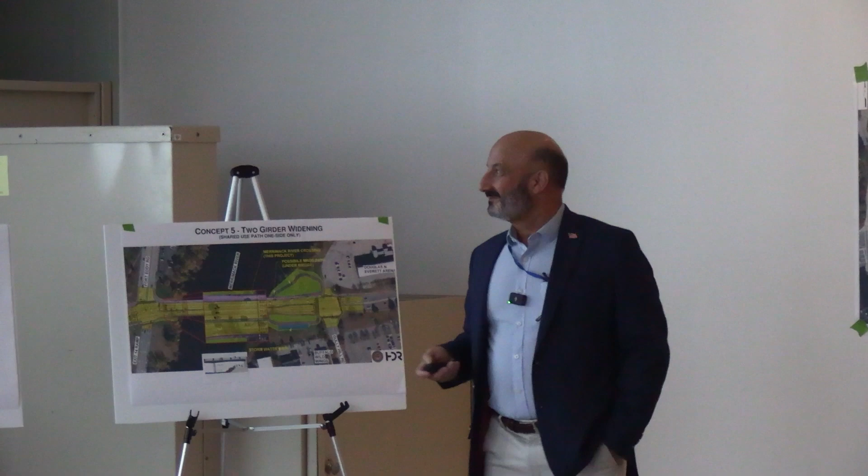Program budget. So when we went to GACIT in 2022 — Tony's here, we can speak — we were working a lot with him. We went to the estimate review committee at DOT. Ultimately the budget we put together for the project at that time was put into the program. It was escalated to ensure there would be enough money over the course of years when this thing actually hits, and that's what's currently in the budget.

So when you look at the state 10-year plan right now, this is what you would see. It's in the program at 24.7, just over $24 million. This shows construction in 2026. However, I'm going to show you a schedule in a minute that would show this going to construction in 2028.

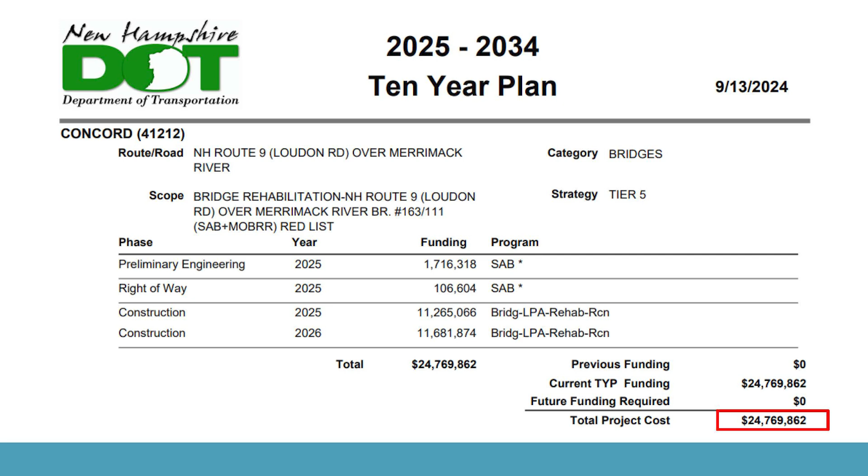So the next steps after tonight: we'll be looking to develop the preferred alternative, complete the preliminary design, and get through the permitting or NEPA process, the NEPA clearance. We're going to come back for a second public information meeting and present to you how far we've come, what we've done, and what it looks like.

So the preliminary design and the environmental study, we're hoping it's going to be done by the fall of 2025, and then we'd be looking to schedule another meeting like tonight to come back and make a presentation to you. Ultimately, final design efforts between summer and winter of 2026, bidding and construction 2027 to 2029.

I see nodding heads. Okay. All right, Mike, I'm going to turn it over to you. That was a lot, and I know we went through it fast.

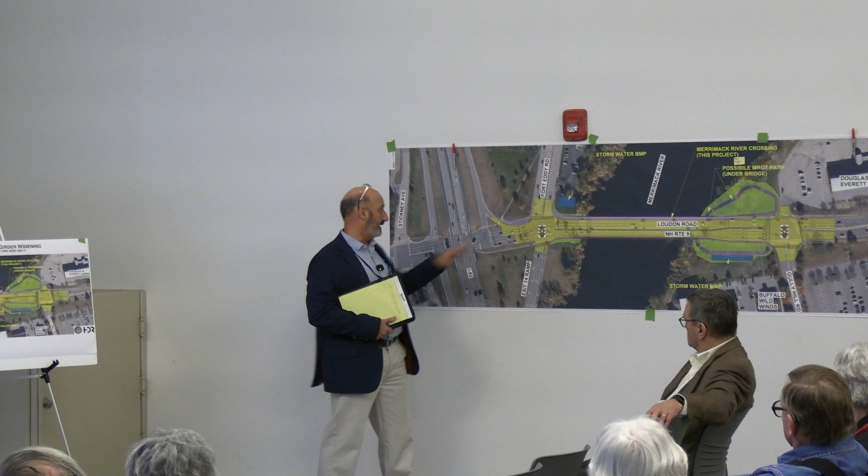I think we did spend some time looking at a southern connection, like you said. Some of the considerations were ultimately not really wanting to cross the Exit 14 ramp. But ultimately we knew that this ramp is going to be going away as part of the state DOT project. Now we know that the right turn, or slip lane onto I-93 northbound, is going to remain there, so this does become something we need to get around if we're going to maintain that concept. Ultimately there needs to be a way to get from this side down to Storrs Street, where it's going to connect to the Northern Rail Trail. I think one of the things we looked at was the difficulties in actually getting to this point and making that connection to the other side.

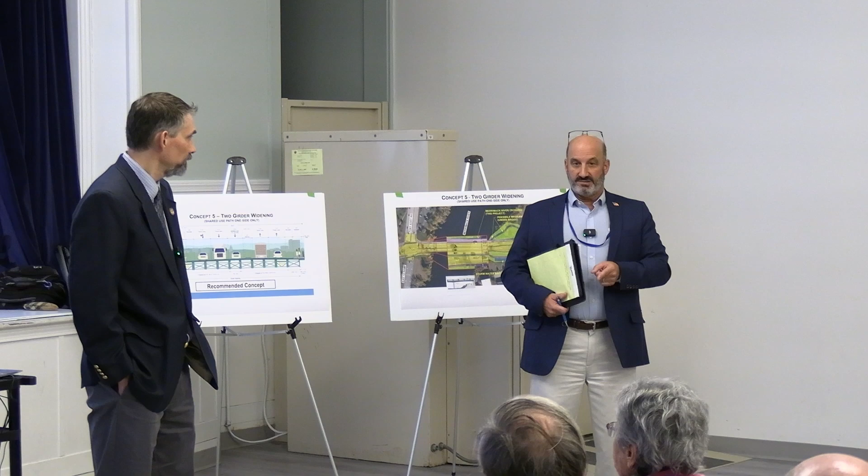Widening on the south side like this, one of the considerations on the structural side that Nick could probably talk to is we're trying to find a balanced way to widen the bridge and provide the lanes up top and all the accommodations for that. One of the things we did as part of this project is a balanced widening so we don't necessarily impact the piers going into the river. Doing what you're suggesting would result in significant widening of the piers on the lower end, which would make construction costs go up a lot higher, as well as environmental impacts.

Nick, do you want to add to that, or is that covered? That pretty much covers it, to support the new girders that are coming up on either side. Come on up.

So to support the new girders that would potentially be on each side, we have to widen the piers at the top where those girders sit and are supported by those piers. But to limit the impacts in the river, we're actually going to reinforce the foundations that are there so we don't widen that footprint down in the river. Right now the piers are kind of pitched in towards the top, and through this project they'll be pitched out, so we're limiting that footprint within the river. That's why we didn't go with the other option, because then you're into additional foundation work and more piles being driven into the river, a longer construction duration, and more cost.

I appreciate your comments, we'll consider it. There was a lot of thought that went into the concept to date, because this affects cost. Do we have other questions?

Will any of these new designs improve the traffic flow? That's what most of us care about. Very often when you're going from the Heights trying to get to downtown, you get stuck on the bridge for two or three lights. On the left lanes, the right lanes seem to move. Will that be improved?

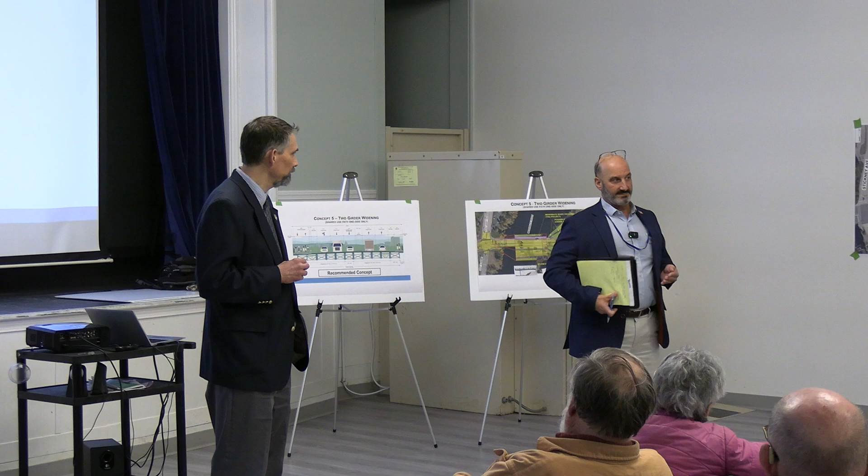When we looked at that versus the cost of the bridge that would have been built alongside it at the same time, and compared the economics of that versus putting it on the new structure on the piers Nick was talking about, where we're not doing work in the river, it just seemed to make sense from an economics and constructability perspective to do that.

Good question. Yes, thank you for the presentation.

I applaud you for putting quite a bit of focus on the Merrimack River Greenway Trail on the Gully Road side, on the east side of the river, trying to go under the bridge. I was under the misimpression that there would be a new bridge, new girders, new undercarriage, so you could get additional height and make it easier to go underneath. But you've explained that's not the case.

But if you can still do that, go under the bridge, I think it would be wonderful, because you don't want an at-grade crossing. I've said this earlier in other public hearings, the city's aware of this, but I've been adamant that you don't want an at-grade crossing either on the east side next to Gully Road or crossing over Fort Eddy. So what do we have left?

So underneath the bridge on the east side would be great, and that's probably doable 95% of the time, except during flooding. Then you would have an at-grade crossing, but during those few times, great. Now, once you go over, you've mentioned earlier you'd have a tunnel under the expanded I-93.